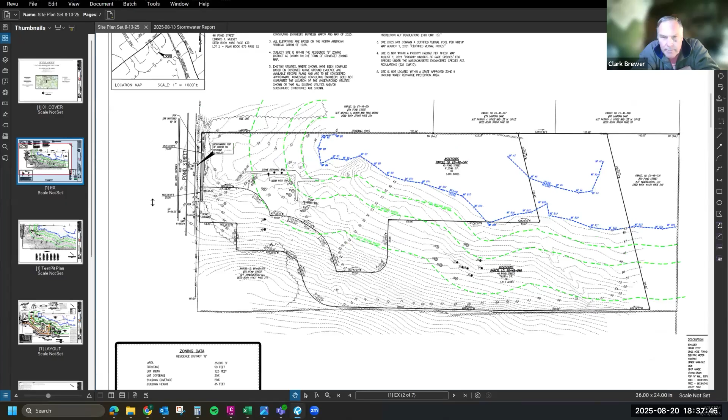So we're here tonight seeking a common driveway application for the properties located at 40 and 46 Pond Street. The site, Pond Street, is located on... actually, can everybody see my screen before I keep continuing? Yeah, looks good. Okay, perfect. Thank you. Pond Street is located on the north side of the property. The frontage along Pond Street is 40. Pond Street is located right here, and 46 is here.

As you can see, the topography is quite steep from the western side of the site down to the eastern side, where you'll see a wetland located on the lower portion of the site. There is also an existing stone retaining wall along the frontage of 40 Pond Street, which continues on to 46 Pond Street, and an existing stone retaining wall located in kind of the center of 40 Pond Street.

So we're here seeking the common driveway application. The applicant is proposing to build 2 single-family homes with a proposed 16-foot wide shared driveway. The reason we're proposing the common drive is to mitigate impacts within the wetland buffer. As you can see in the outer limits here, that's the 100-foot wetland buffer. By proposing a common drive, we're able to push the driveway pretty far out, actually completely out of the buffer, as well as minimize the impacts of the houses within the buffer.

By doing this, we're also able to minimize the grading that would be needed, rather than installing 2 driveways that would run right next to each other on these steep grades as you step down from the western side to the eastern side. We're able to eliminate a lot of grading. There's also an existing natural swale that runs along the northeastern portion of the site that ultimately ends up at this wetland. By shifting the driveway and only having 1 driveway, we're able to avoid any impacts to the existing stormwater that exists there today, as well as being able to save this stone retaining wall and this stone retaining wall.

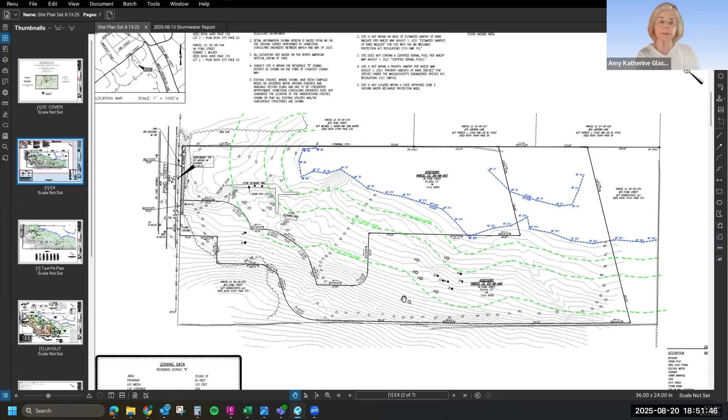This is obviously the first time we've been involved with permitting. I'm not familiar with anything previous to this, but we selected these locations due to - let me find the best sheet to show you.

So if you can see this purple line that comes through here, I can highlight it so you can see. The reason we selected these locations is that they're the most efficient to minimize buffer impact, as well as environmental impacts, like that natural swale that runs through there and those existing stone walls out front. These are two separate lots.

Highlighted in yellow is the building setbacks, so we are kind of maxing out the amount of upland within the building setback. As you can see, because the lots are funky down here, this is really the only area that makes sense for development without disturbing the existing swale and stone wall. You start to get into the 50-foot buffer, which is a no-touch in Cohasset. So we chose that location for 40 Pond Street to have the least amount of impact to the environmental issues on site.

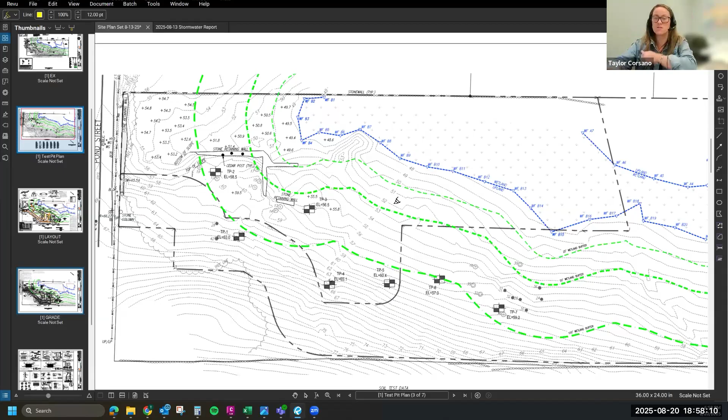It appears your driveway follows some of the natural topography where it can and where your setbacks allow. Did you consider anything more sinuous in the driveway? Instead of coming out and bending at that angle and making a straight line down, perhaps something a little more sinuous that might work with the existing topography a little better?

Yeah, so we did originally have the road coming out a little bit more this way. It was a little rounded, then kind of turned its way back. Concom didn't like the roadway in there, so we were trying to pull it out as best we can. That's why it's straighter in here.

So then perhaps something where it heads off of the road, it ties into there, like Pond Street. Yeah, and then it kind of makes a bend, and then another sinuous bend tucked in, maybe down a little further, even further up.

Now over here in this corner, I can see the property kind of comes down. So it's a sinuous curve coming out, and then you have one tucked in down here where you just had that corner, and then it does another one over there. So it's a little bit more sinuous, just coming down to where the area of the first home is.

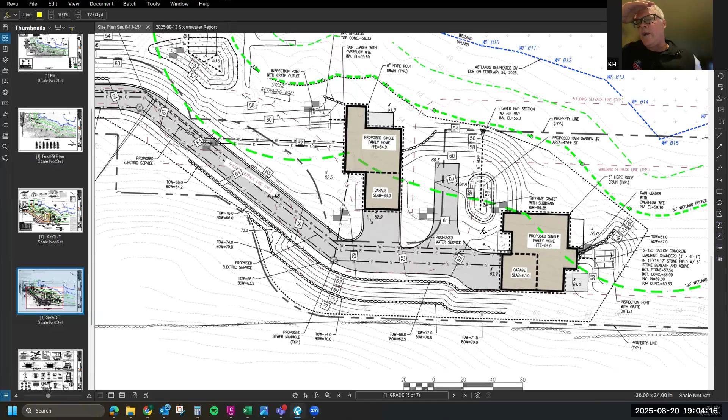Just one other thing that strikes me — you've got two rain gardens here. One of them has a more irregular shape, and I suspect that might just be tied to the topography over there — that's the one you're highlighting. And then the other one, over in the area between the buildings, looks more oval and pool-like. Is there a reason why that one is more of an oval, less natural looking?

So, not really. We tried not to make this anything too crazy because it's in the front yard of that home. So it's kind of just how the grading worked out. There's not really a rhyme or reason to the shape of it.

Okay. And with regard to one final point here, and I'll let other members have additional questions — what type of vegetation are we talking about that would go in those rain gardens? There's usually a particular type of vegetation that doesn't just go haywire and start clogging the infiltration capacity of a rain garden, but sometimes there can be provisions for that vegetation to have more of a native type focus.

And is there any provision for the latter? So I believe we have specs — the Massachusetts Stormwater Handbook gives you a list of allowed plantings. So that's what we have specced. They can pick a mix of those plants.

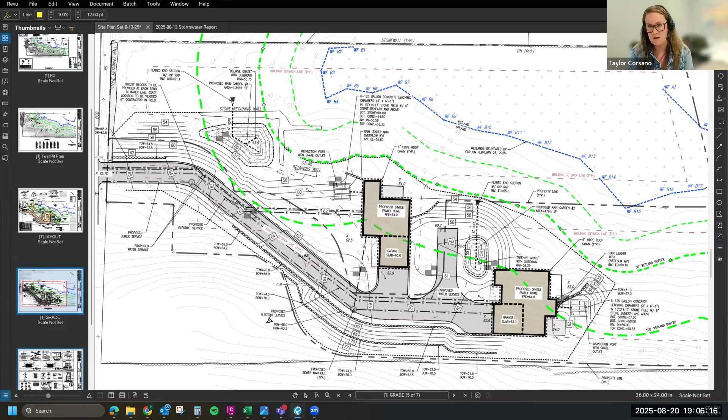That's in process. We had one initial hearing with them. We did a site walk, and we're supposed to be on tomorrow night, but we may have to continue. So we're in the process with them.

Okay, alright, well I'll just leave it at that. I appreciate the additional information with regard to perhaps a more sinuous driveway, and understand now better why it's more linear.

One of your rain gardens just strikes me as kind of artificial looking with its oval shape, and whether that could perhaps be more sinuous or natural looking might be beneficial, and whether the Massachusetts provisions for allowed vegetation in rain gardens could have any type of native focus or priority. I think that would be beneficial for all involved. Thank you.

I'll turn it over to any of my colleagues that still have questions with regard to this.

Birgit? Yeah, I had — with respect to the driveway, I appreciate that you added that. That was the first thing that I saw from the first plans. Can you explain again — Patrick, was that your comment, that we still need to get confirmation that it is the right width and size in general to allow for the appropriate turning?

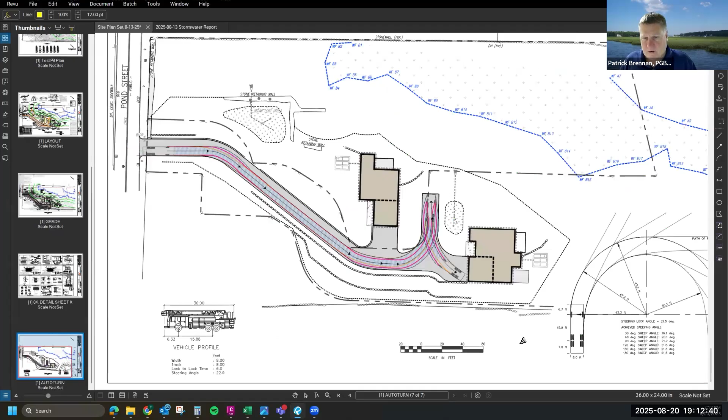But there's the swept path analysis with that design vehicle that the bylaw specifies, so it shows that the vehicle can maneuver and turn around in that turnaround. Yeah, okay, thanks for that.

I will say that in looking at this particular driveway, if there was an emergency and vehicles were trying to get out, the prospect of one overtaking the other could actually be a serious possibility, right? Because that house that's the furthest from the road could in fact end up running into the vehicle attempting to do any kind of rescue in the first building. So it's sort of like you can get halfway, but if there's a fire in the first house, you may not have a lot of ability to get around it.

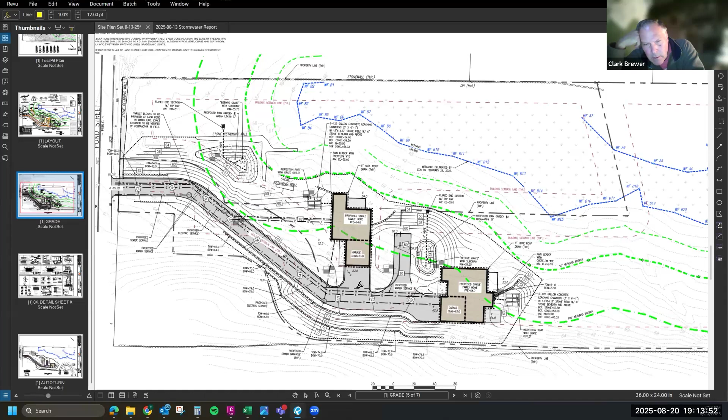There's a big flat area, especially in the first house, for vehicles to hop the curb, so to speak, for what's paved. No further comments.

Do we have any members of the public, Julia, that you see that wish to be heard on this matter? And if so, they could indicate by raising their hand, and Julia, you would promote them, and they would introduce themselves by name and address. Mary Jo Larson is being promoted.

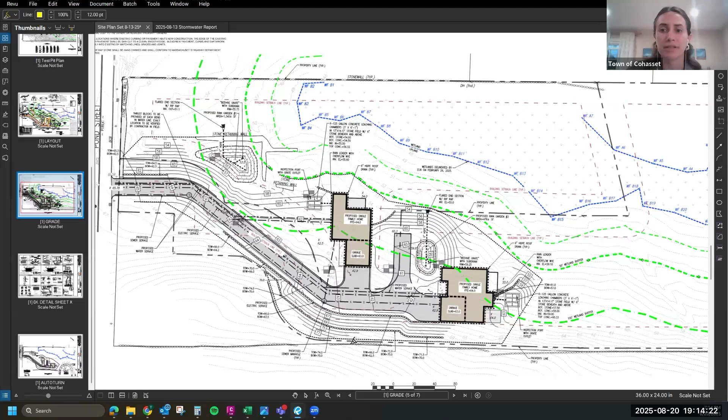My name is Mary Jo Larson. I live at 12 Virginia Lane, and I'm one of 25 neighboring abutters who signed a petition, carefully prepared with 7 attachments.

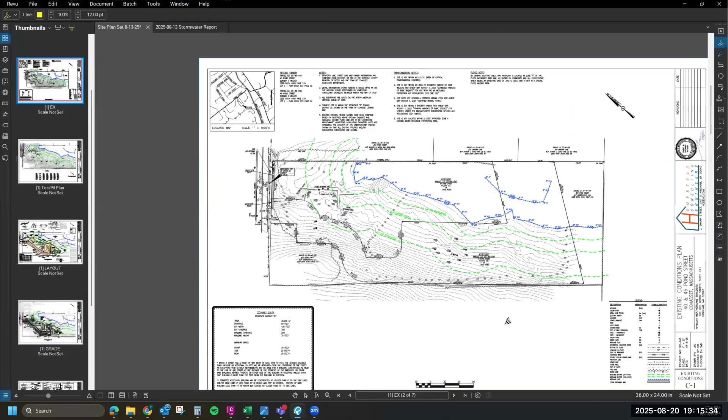For this planning board meeting, I'd like to focus on the common driveway. Listening to the discussions, I see much more attention given to mitigating impacts on the eastern side of the property versus the western side. If you would put up the map, I'll explain where my house and my neighbors' homes are. I'm on 12 Virginia Lane, situated on a sloping hillside directly across from the ravine.

During heavy rains, such as the storm that caused flooding and road closures in early July this year, rivers of water—Patrick stated it clearly, water runoff will be sheet flow over the driveway. The water floods down our driveway and goes across the backyard right into the ravine below. That ravine is steep, in some areas 35 degrees. So my concern is really the western side.

I see tremendous effort going into the eastern side of the ravine. So for us, not just myself but my neighbors, a major concern for our Virginia Lane properties and the properties below is the retaining wall, which is there to protect the driveway. Patrick did mention that the wall is to keep the hillside from coming down into the driveway. The hillside is eroding all the time.

That retaining wall, which protects the driveway from stormwater runoff, flows into the ravine from Virginia Lane. The risk during an intense storm is that as the retaining wall blocks and redirects the stormwater runoff, that concentrated stream of water will destabilize and erode the western side of the ravine over time. This phenomenon is commonly known as the piping effect. It could create significant stormwater damage affecting our properties, which abut the ravine from Virginia Lane.

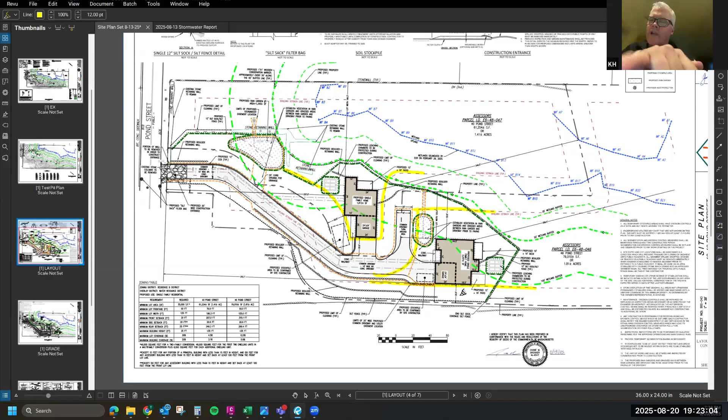So just to get me oriented, make sure my orientation is correct - you're saying the western side would be in the area over there, down there, the properties on another side of this topographic high point? Would that retaining wall put those properties at risk? Just to clarify - this design really focuses more on the protection of the eastern side, but what you cannot see from this mapping is that on the western side there is a steep ravine.

And by the way, erosion is a tremendous issue. We are constantly planting and trying to protect our properties from that. That's the edge of the ravine. I think I got a better picture now. So there's something off of this schematic shown right here you're describing as a ravine. Yes, and not being familiar with those private properties, but it sounds like you and your neighbors are. It sounds like that ravine functions as an intermittent stream, perhaps during periods of high flow.

That stream manifests itself, provides drainage from the area, and then disappears in between storm events. Okay, so the water flows down that side of the ravine. It's just so it's not a ravine - I was using that word a little loosely. It's a hillside, which is very steep. So yes, they are on the high side.

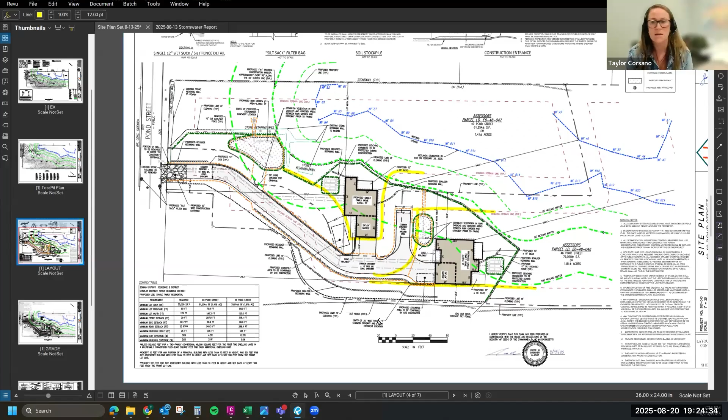So today, stormwater obviously goes from high to low. So as part of the stormwater management, we have to mitigate peak flows as they exist and as proposed, which is the stormwater that Pat Brennan had reviewed. And we had that taken into all directions, right, Taylor? Correct. Yep, that's my understanding.

Okay, all right, thank you, Mary Jo. You're welcome. I appreciate your time and your time with the neighbors gathering these concerns, and I would absolutely encourage you to bring them and attend, as I'm fairly certain you will be doing, the Concom in future meetings, whether they're tomorrow or carrying forward. Thank you. Thank you, Mary Jo.

Julia, anyone else that we can promote and provide an opportunity while the public comment period is still open on this issue? Not seeing any additional hands at this time from the attendees list. Okay, so we'll just pause for a moment here to make sure that is the case or remains the case. But if anyone is interested, we're providing an opportunity to do so. Raise your hand, you'll be promoted, and then we would just ask that you introduce yourself by name and address.

Kevin, Amy's got her hand up. All right, thank you, Clark.

Thank you. In a case where there is a deluge and the bank begins to creep downward and covers the driveway, who will be responsible from an insurance perspective for the maintenance and recovery of the site? As a part of the common driveway application, there needs to be a homeowners association, or some type of entity that is responsible for the maintenance of the stormwater systems and the common drive, which would be shared between the two homeowners.

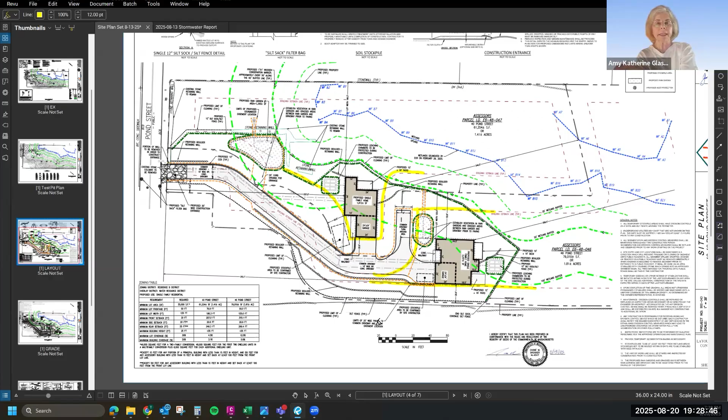You're asking Amy about other property owners, not the two that would share this driveway? I'm asking about the actual circumstance if there was a sloughing off significant enough that it not only has a consequence for the common driveway, but actually impacts the two residences. Would the residents have a separate legal structure to protect themselves, in addition to managing and recovering anything that would happen on the uphill side properties?

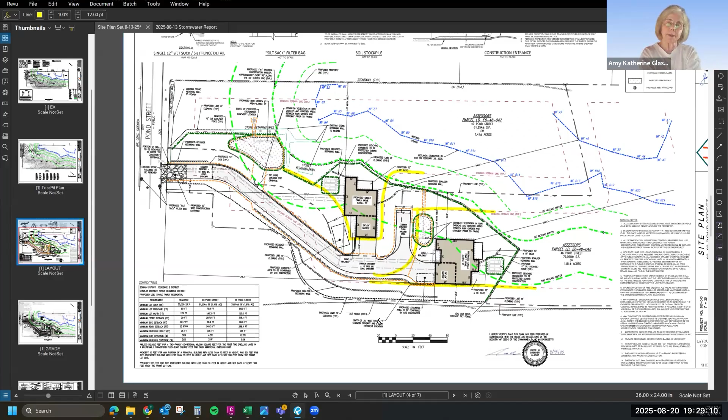Right, because it's the dirt coming down onto the road that's going to be the problem. Then the question becomes, how does the liability actually get distributed? I'm not sure that's within the purview of our common driveway approval process, Amy.

I certainly am not one to provide an answer on this. If anyone else has additional information, they can put it forth here, but I'm not sure beyond what you said about dirt coming from high points and sloughing onto the driveway. Patrick, you didn't use the word easement, but covenant and maintenance of that driveway, keeping it free of detritus and sloughing materials from the high points on the high side of that road.

Correct. And because this issue is being brought up, we had questioned earlier whether the upper retaining wall should be within the easement. Given these issues, I would recommend that the upper retaining wall be within the easement.

Could you say that a little louder, Patrick? You kind of trailed off. I'm sorry, I would recommend that the upper retaining wall also be included within the easement so that it's in that same easement with the common driveway, so it's all together. All right, thank you.

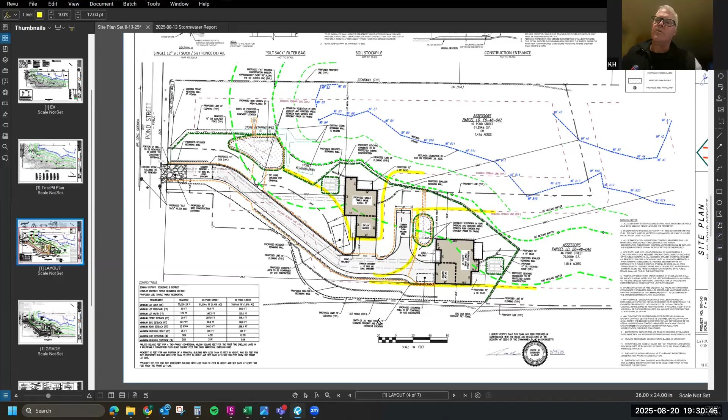Taylor, your thoughts, your client's thoughts with regard to that recommendation? I think Curtis is on, but I don't think we have an issue with that. Okay, all right. Would that by any means address anything of what Mary Jo just brought forward?

Would that help in any way control the water flow so it would not impact their properties? The water flow she's talking about, their properties are well up-grade of this. So the concern was that this whole area would wash out and start to erode back toward their properties, which is unlikely.

And the retaining walls would need to be designed by an engineer, so those would be engineered retaining walls. The stability of those walls should not be in question once they're designed and approved. But...

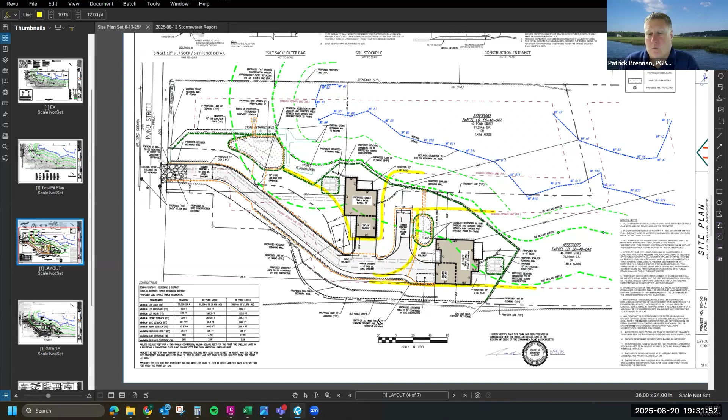Currently the water runs down there. As Taylor showed you on the existing conditions plan, it's a steep slope now. With the retaining walls and the flattening of the yards for the houses, that's going to slow the water once it comes down over those retaining walls. Most of it's going to hit that common driveway, run down along the Cape Cod berm, and then across the grass filter strip I mentioned previously into the rain gardens. Right now it just goes uncontrolled down through that whole area on that steep slope. This is going to break that flow a bit and put it into these two rain gardens to slow it down even further.

So the concern about that slope and the retaining walls being unstable, if it's designed and constructed correctly, there should not be an issue there. If it's eroding today, by making these improvements, it should help the situation.

Right. Okay, I appreciate that additional information, Patrick. Barring any additional interest in the public in commenting on this, I entertain a motion to close the public comment period for this common driveway application for 40 and 46 Pond Street.

So moved. There is actually a public comment from Richardson. He'll be promoted to panelist. Okay, we'll entertain that.

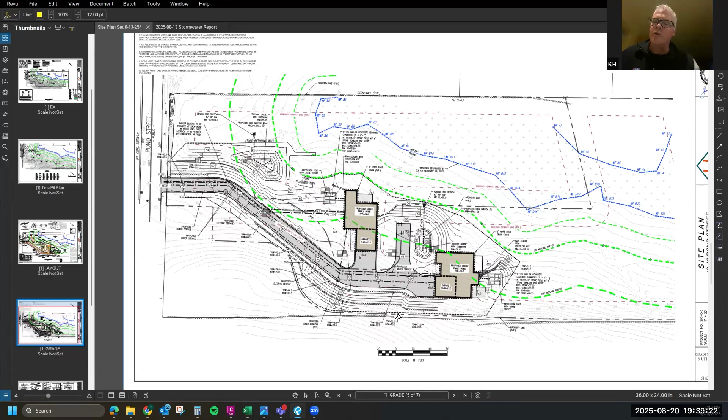Did you have any other questions or concerns?

No, I appreciate that context, and I think Patrick's point was the point I was trying to make as well, which is that I want people to be aware, because when my family and I moved here in 2007, I was surprised there was no drainage along Virginia Lane, and that the only drainage is a catch basin at the corner of Pond Street and Virginia Lane. Living here since, I've seen water stream down across lawns and over Virginia Lane, across our lawn, and collect down on those lots. I just wanted to make sure folks understood the sheer volume - it's not just runoff from Virginia Lane, or from Richardson's Hill, or from the Larson's driveway. This runoff is coming from Bancroft all the way down, and I wanted to make sure that context was represented.

No, I appreciate you taking the time to enlighten the board and make your comments public. And as I mentioned to Mary Jo, I would encourage you to bring those points in front of the Concom in the meetings planned for this project as well. Yeah, thank you. Thank you.

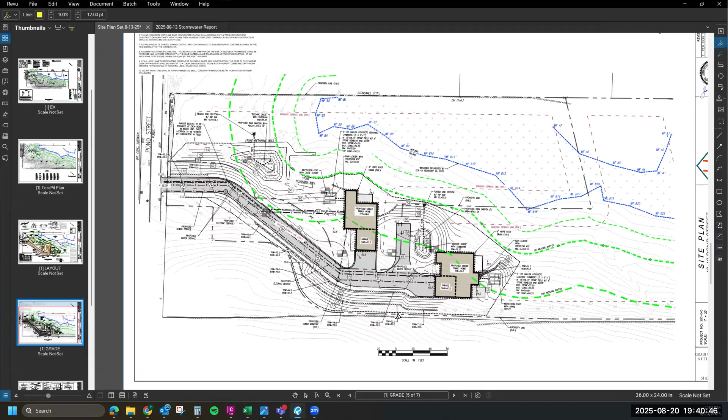Okay, without further ado, is there anyone else, Julia? If not, Amy, I see your hand. Yep, sorry about that, but we do have a stormwater report, and I would like to have it narrated.

We've got images that indicate what happens, and I would like to know from a professional engineer's perspective what these pictures are telling me, and why there are different colors like blue and orange. Is this trying to simulate an experience that could happen, or is this a regular circumstance? And if it's a regular circumstance, is it necessary to mitigate now versus waiting for something to happen, or is this not an issue?

And to clarify, what is it that you're referring to? There's a stormwater report with at least 15 pages in it, and in it there are three images. One is the site itself. The second has image material in blue and orange, and I presume blue is water. And then there's another narrative.

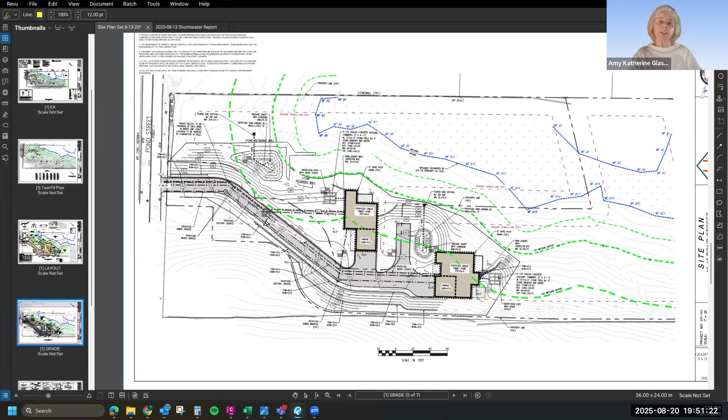You realize we need a 4-person approval for this to pass because it's a special permit. I do understand that. Unfortunately, as the meeting went on, more information continued to come in. It doesn't matter, it doesn't matter - that's your vote. Kevin Heine, aye. Birgit Schmidt-Besche, aye.

So we have 3 ayes and 1 abstain. And Carolyn, if you don't mind, tell us where that leaves us.

That fails to get the supermajority vote that it needs for a special permit. So, does this matter continue in favor with modifications, or... I'm trying to understand where that leaves the applicants. Well, since you just voted, that tends to be the end of this road.

They can reapply, right? Well, there's always reapplication with a modified plan, or some modification made, because there's a 2-year prohibition against a repetitive petition coming back, so it would have to be materially different. They could also appeal to land court, right? They can appeal, yes.

So the public hearing already closed. Can I speak at all? We've already discussed the project and closed the comment period on it.